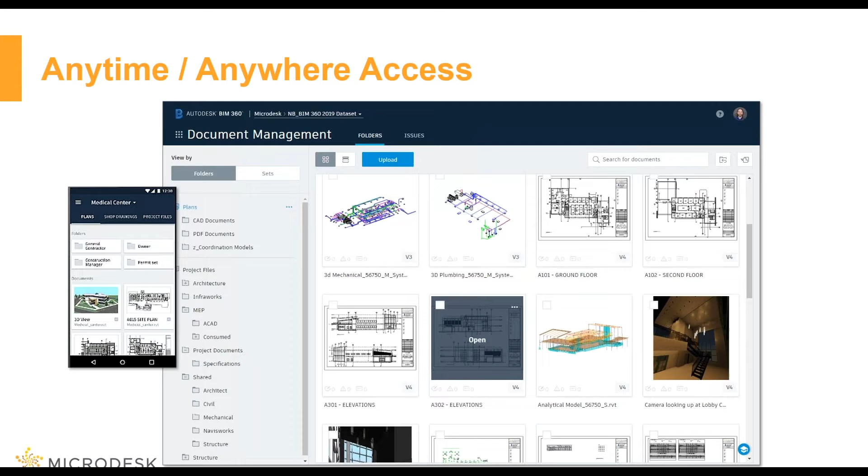So that's usually the first one that comes up for everybody. Now the next one is: well, our team isn't in the same place. As projects are growing, people are working for different companies, working as consultants, maybe taking the lead on something, or looking for additional work outside their normal range. Our teams are starting to break apart. You might have three people in one office because they're available, so let's put them on this project. This is great from a standpoint of putting as many people on the project from everywhere, but it's not that great from a time or money standpoint when looking at how fast or efficient that process is. It's usually too expensive to ship people to the other office.

And if we're using things like VPNs, you could be spending hours a day just opening or saving. It's not the smoothest or fastest workflow.

When dealing with spread teams for BIM 360, what we end up doing is taking our central model and putting that in the cloud. So we can store any kind of file format we need, whether it's AutoCAD, Revit, IFC, or PDFs. For teams working in Revit, our central file is in the cloud, and what we end up doing is create things called packages. So when I'm ready to share my model with the rest of the team, I create a package and share that with them. Then they have the ability to review what I've given them, so it doesn't automatically end up in their files. They can check it out and make sure it actually does what they want first.

And the nice thing about this is it's very easy to see the time frame. So if I create a package, you actually have this timeline. I can see when the packages were created, by which member of my team, what's included in it, and whether or not the other teams are actually using it. So I have a lot of control and a lot of accountability. I can see everything that's going on.

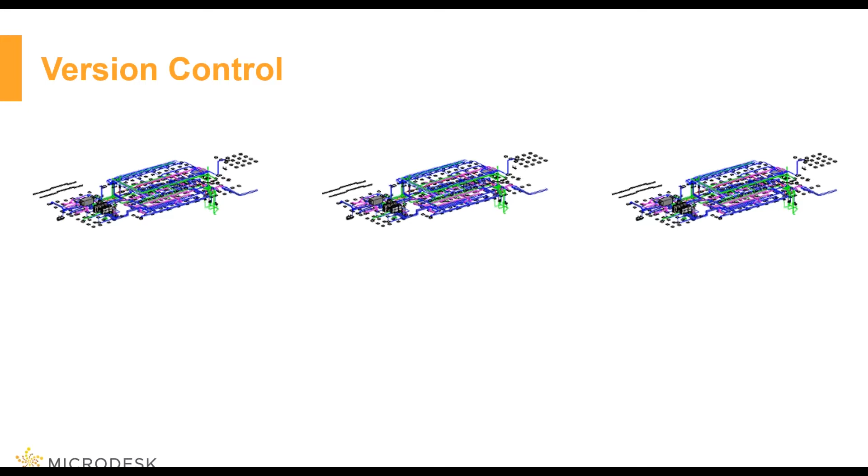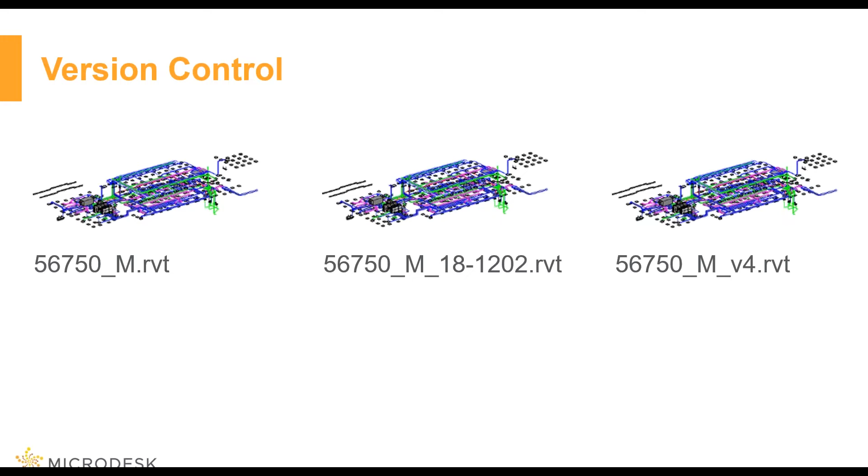The next big thing that tends to jump out at people when we start looking at BIM 360 is the ability for version control. Most of the time when we're working locally, you start sending emails around and you might have the same file in 3 or 4 places. You might see that file format's the same, maybe the file size is the same, but then we have 3 different file names. So now the fun is trying to figure out which version is actually the right one or the most recent one. And maybe compounding that problem, somebody accidentally opens up the file in the wrong version.

So now how do we roll this back? Or somebody sends that, saves it over, and now I'm trying to figure out how do I actually move forward? Where do I get my content from?

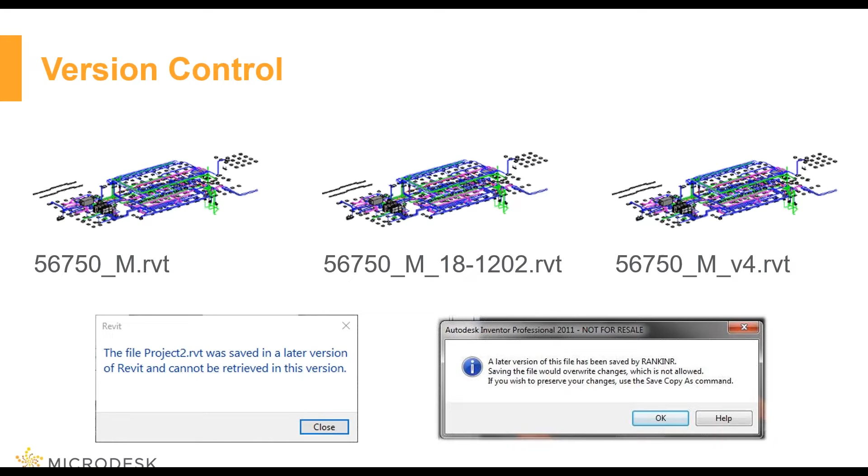One of the great things about BIM 360 is that I have full version control. I have an indefinite amount of versions for my files. Every time I upload or sync my file, it's tracking that. I can see the versions that were published, I can see the versions that were synced, and I can actually roll back or download those different versions. If when people are actually syncing to the central file from Revit they're putting in comments from the tools inside of Revit, I can easily search back as far as I want based on the user, the comment, or the time. So I have all of these version control components.

And it's very easy to see what changes between those different versions. This is one of those tools from the timeline again, the packages I called it before. This is showing me all the content that was added, removed, or modified between these 2 packages. So when somebody sends me an update, in this case I'm looking at the structural package, I can easily come in and see what am I reacting to, what have they changed in that file since the last time I saw it.

On the left-hand side, you can see I have my disciplines affected, and there's also a modification type. This allows me to filter this down. If I only care about one discipline, I can say just show me that one. If I only care about certain kinds of modifications, like show me things that have moved, I don't care if they change the properties, I can use that as a filter. So it gives me a lot of control in terms of understanding what's going on in my projects.

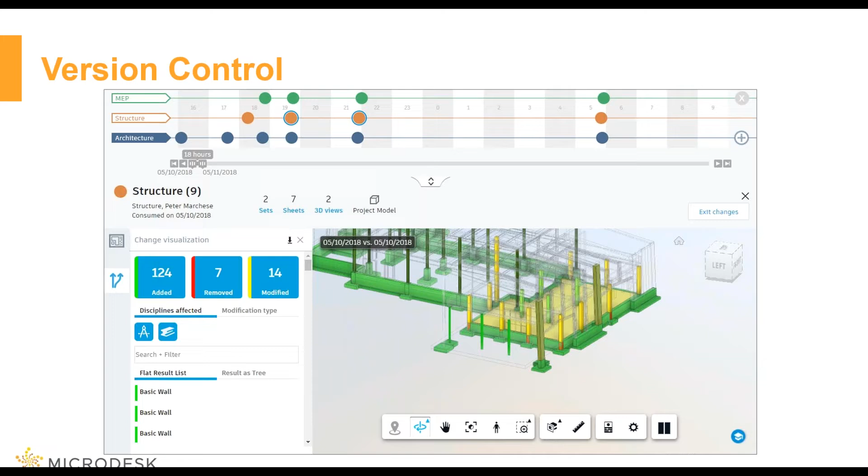As part of that work as a project manager, there's always the ability to review those projects. Now all of us have very busy lives, and trying to get work done wherever you can is kind of normal. However, when you're working in the old school way, you've got your rolls of drawings or even 11 by 17s, commuting on the train or public transportation, it's not always the best place to sit there and try to mark up or review work. But all of us have phones, so we have access to our content.

The other problem we tend to run into with project reviews is that game of telephone where we start going around and around in a circle - okay, who wants what, who needs what? And you're always trying to find where in the notes somebody said one thing. Maybe it's all inside of emails, and one person deleted some, one person forwarded it. And again, you don't really remember why a change is being made.

With BIM 360, all this information is easily accessible, again, from mobile device, website, and it's all tracked as part of the project record. If somebody is putting in something like an RFI, which is part of the build package, there's a workflow for that, and that result is tracked. If somebody is putting in an issue, which is available in any of the services, that allows me to track that. I can see who put in the issue, based on the color of the issue dot I can tell exactly what the status of the issue is, and I can actually assign the issue to individual people, groups, or teams.

And what I can also do is track that status. So what you might notice here is that this is telling me it's in the site plan, and it's version 3. So I can see what version of the document that issue was created in.

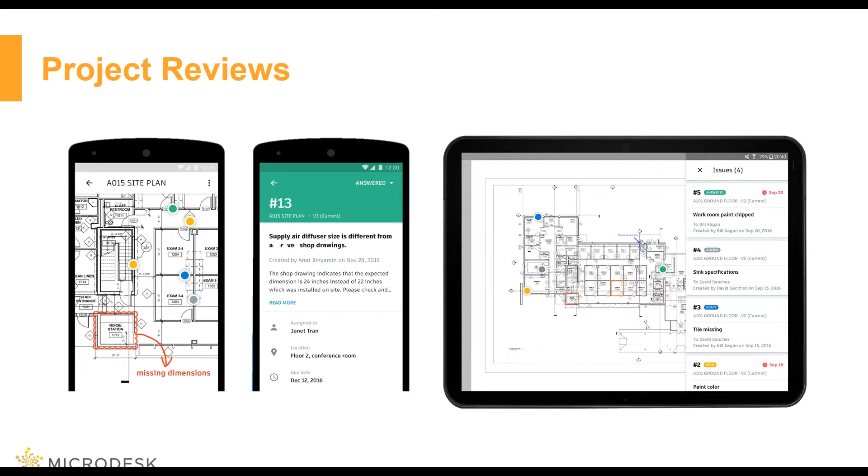And one of the nice features here is that inside my document management, I can see all my current issues and what that status is. I can create and export a report from here.

Recently, Autodesk added another feature here called actual reviews, where I can collect or create essentially a set of content and submit that for review. I can make it a 1, 2, or 3-step process, meaning it can go through multiple stages for review, and I can automate the process.

Once this review is done, any content that is accepted can be automatically copied into a specific folder, almost as an archive or a record set.

So this is one of the newer features. If you watched the last webinar, this is new since then. But this is specific for reviews, and it works perfectly for users to keep track of what's going on.

Now the big one here is coordination. Not everybody we work with on a project is going to be using Revit, so there's still that issue of coordinating with other users who are maybe using different content.

I can still post content onto BIM 360 that is almost any file format. If I put up my DWG files, I can still view them, mark them up, put issues in them, and link to them in my Revit model.

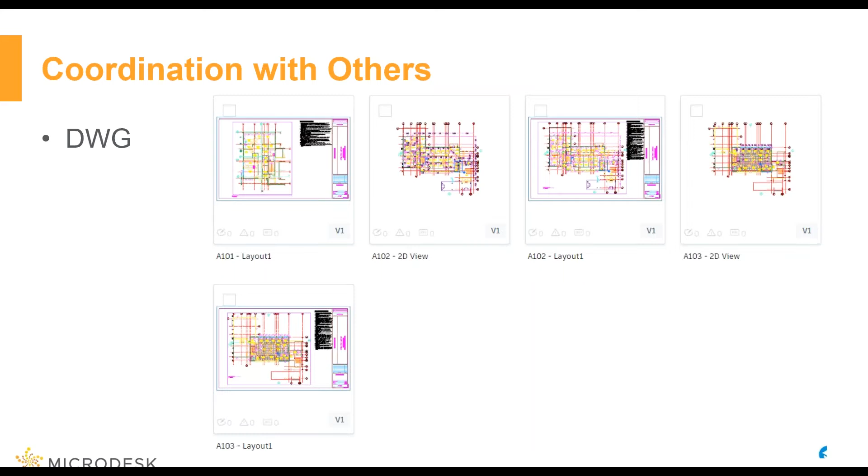The benefit of using BIM 360 for the linking here is that this puts it in the exact same file location for everyone else on the team. So I don't have to worry about people downloading them to their server and maybe forgetting to update. This ensures we're all looking at the same version.

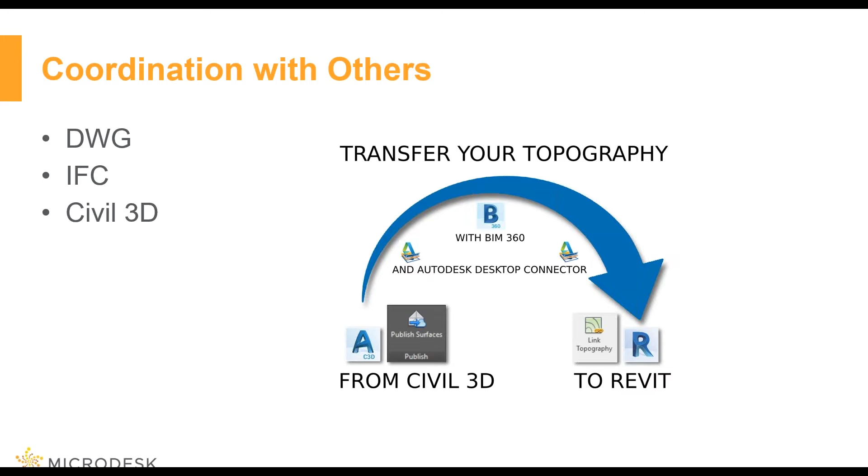Same thing for IFC files. I can link an IFC file from BIM 360. If we're coordinating with civil users, there's actually a workflow to publish the surface from Civil 3D directly to BIM 360, so I can link that topography in Revit. This ensures that the topo in my Revit model stays up to date with the end result.

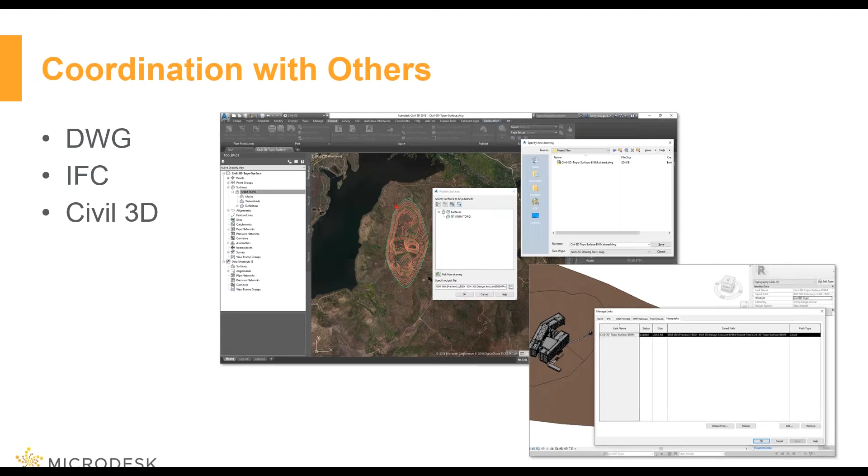So much more streamlined workflow with our civil team. And if that civil team happens to be working with InfraWorks, perfect — I can easily put the InfraWorks model in the BIM 360 project. That allows me to view it in the browser, track my versions, look at different views, and do markups.

And if I've actually linked my Revit model into the InfraWorks project, I'd be able to view that on the site in the browser as well, without needing to own or know how to use InfraWorks to do so. Anybody can hop in there and start navigating around and seeing how the design works in the site.

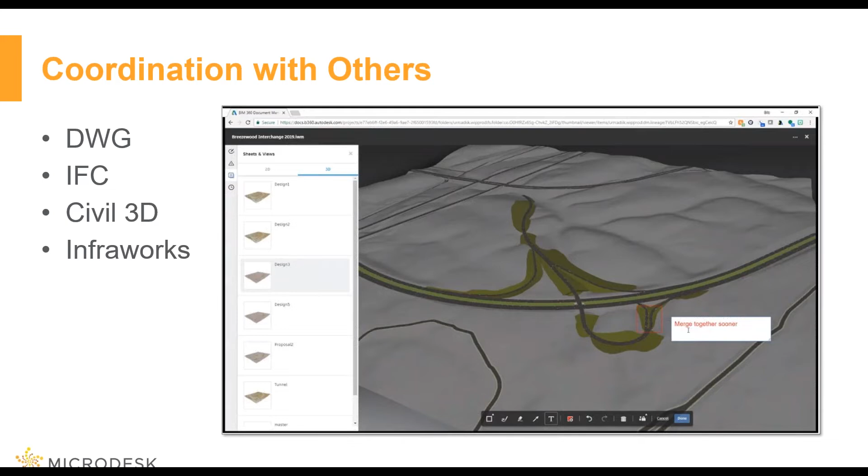So there's a lot of different things we can get from using BIM 360. The BIM 360 design process is specific to working with other teams, allowing you to have a lot more control. You're not just using it as an FTP, or replacing OneDrive or Dropbox — you're using it to really allow an entire team to coordinate and collaborate with each other, using the tools to help create and foster a workflow that's more efficient and hopefully more communicative between team members.

And there have been enough studies showing that if you implement a cloud technology solution and actually implement it — not just buy it and turn it on, but make sure the workflow is set up for you — it can actually impact the project lifecycle cost. It'll cut that cost by a good amount, especially when you look at how much money is wrapped up in construction. It's a very large number.

Now, getting access to this is actually pretty easy. If you own the previous versions of, say, Collaboration for Revit or even BIM 360 Field, you already have access to the new version.

Getting access to Insight is something that's relatively new for all of the teams. Previously, it was only available for Build. But Insight gives you a lot more information in terms of the status of the project, where things are with issues, and how things are running. It also gives you a readout of all the reports that have been created.

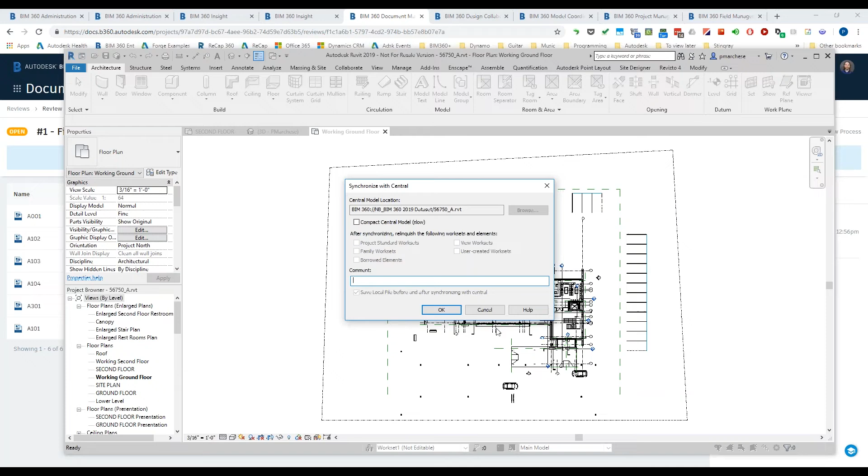Last save prior to deleting option B. Let's say the client comes back after 2 months and says, yeah, you know what, I think I like the other option better. Rather than spending several hours combing through different versions, trying to find whichever version still had the different design options or the other content, if I put a comment in here, that acts as a tag or a mark for me. That means that when I'm in my Collaborate ribbon, I can look at my Manage Cloud Models.

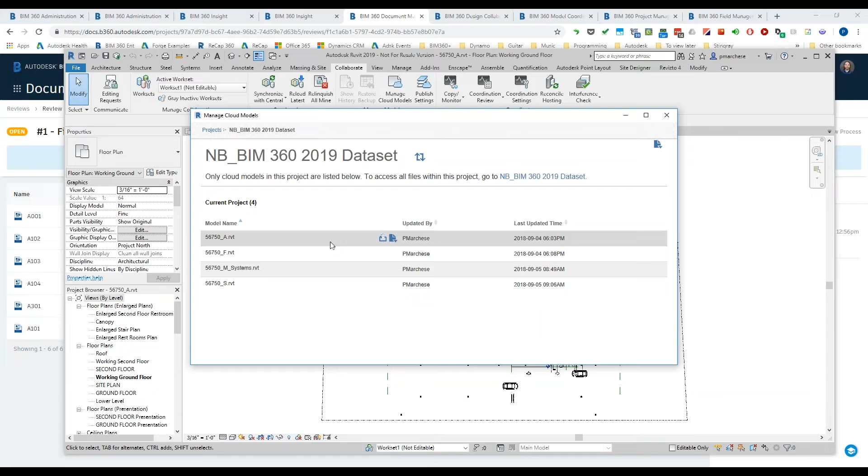There you go, and I'll be able to go back through that. So in this case, when I start looking at my different projects that are in this version of Revit, I can see I'm looking at the architectural file, and I'm looking at my versions. So now I can see the different comments, the users, the timestamps, and I can easily search by that version. So if I say furniture, it shows me that specific version that had furniture in the comment. So it makes it very easy for me to start tracking down the different files and versions and content that way.

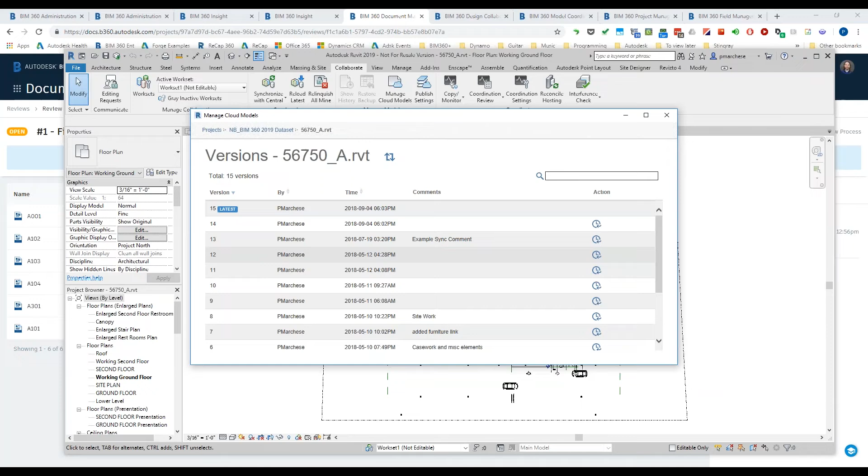Now, the reason why there are four versions is because you don't want to pay for stuff you're not going to use. So each version essentially works off of Document Management, so that way we all have a common library. But if I'm not going to be doing things where I need to do punch lists or I need to do RFIs or submittals, then I don't need BIM 360 Build. I just focus on the package that I need. So that's why there actually are so many versions. So you just pick the version that you want, and that's the version that you'll get.

And in some cases, companies might need all of them, but if I get 10 seats of each one of these, that doesn't mean that I give out 1 seat and that's pulled 1 from all of them. Docs are perfect for people who just need to access the website, so maybe the client or project managers. BIM 360 Design is for my Revit users who are collaborating through the cloud. Maybe my build team are the crew that are out in the field doing inspections. They're doing punch lists. So I pick out the correct or appropriate tool for each team member.

And if there are questions as to which package you would need for your team, we're glad to help work with you on that.